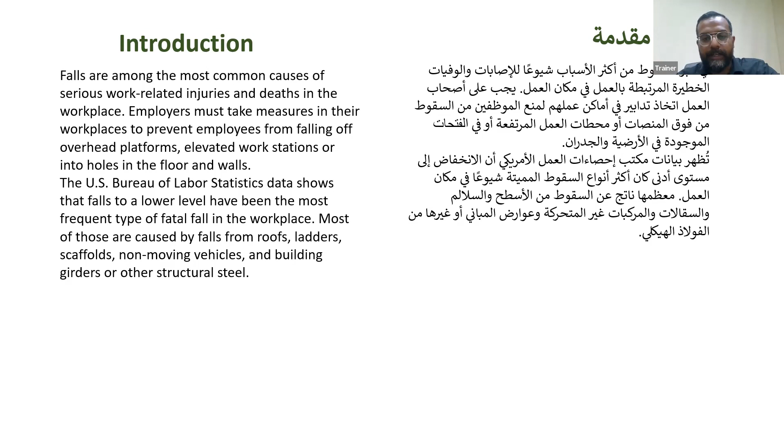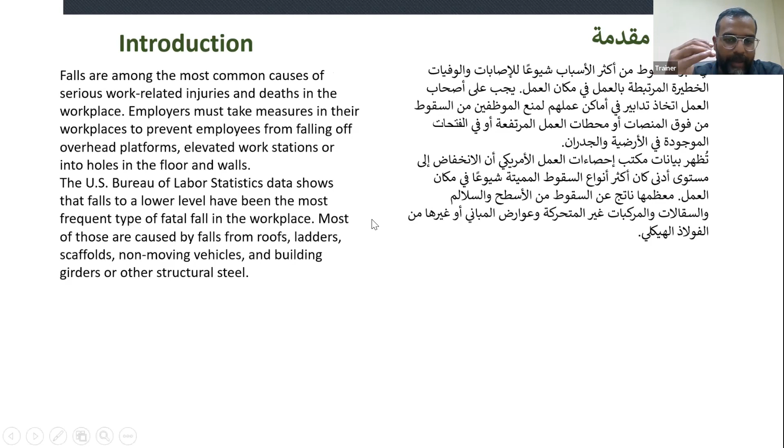So there will be lots and lots of potential for falling. Before moving forward, can you please describe the process you are following in your company, or what is the major hazard of fall, like why you are enrolled for working at height? What activity makes you go on height? Can somebody tell me?

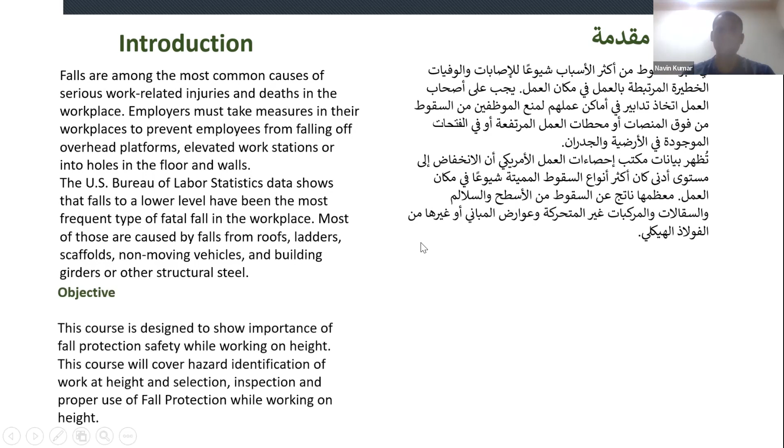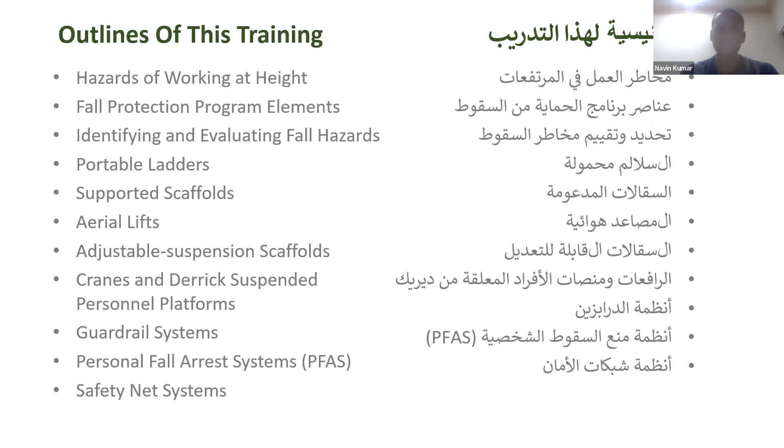Praveen responded: Now I have to work on stack testing exactly, so I have to go to the furnace or the stack at height. So it's required for me to get the safety training for our safety purpose. So this is the main reason why we are here.

Okay, and other people as well, I think. Javed is also in the same field. He has 9 years of experience in this field, working since a long time, so I hope he is aware about all the safety things.

And others, last time when we did a session with your company, with your other team members, they told me that there was some kind of platform they have to go on top of to verify if the tankers are filled, something related to this. Is it the same scenario in your job, or is it different? I think, sir, in the fugitive leak monitoring, we go on top of the tank. So this is also related to our job.

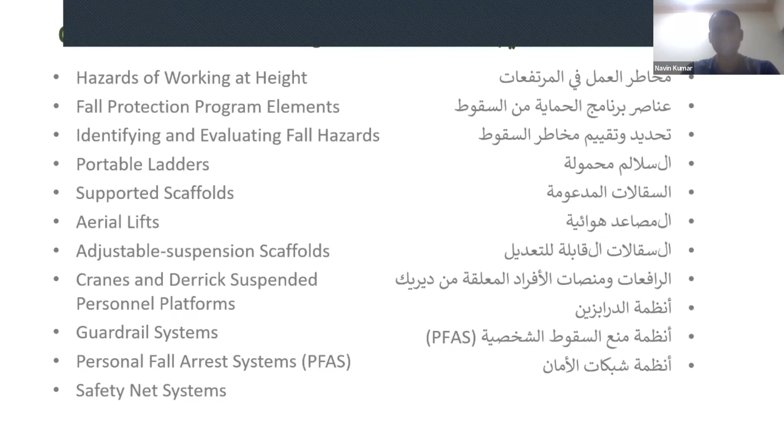And your work is inside which facility, Aramco or Saudi Electric Company? We are in the stack testing field, so we have to go to the facilities and do their stack testing. Environmental monitoring of the emission, stack emission monitoring like this.

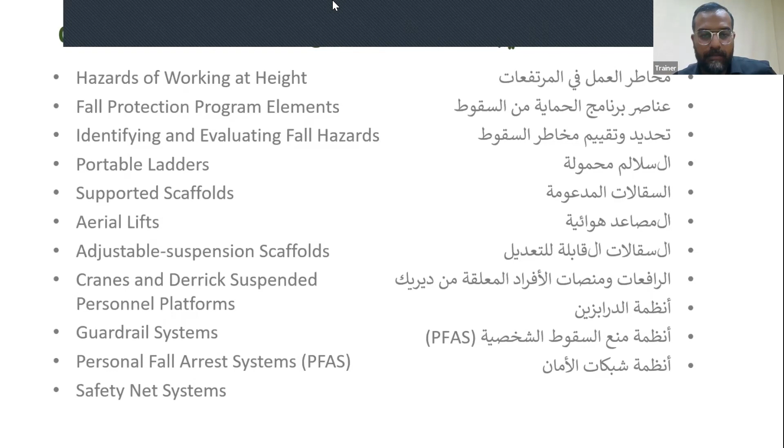So moving forward, I will tell you what we are going to discuss in this training. First, we are going to discuss the hazards, the dangers you are going to face when working at height. Then we are going to discuss the fall protection plan or fall protection program. Then how to identify hazards, how to evaluate hazards, how to use portable ladders, how to use scaffoldings, what are the guardrail systems, what are personal fall arrest systems, how we use safety net systems. These are some of the things we are going to cover in the training.

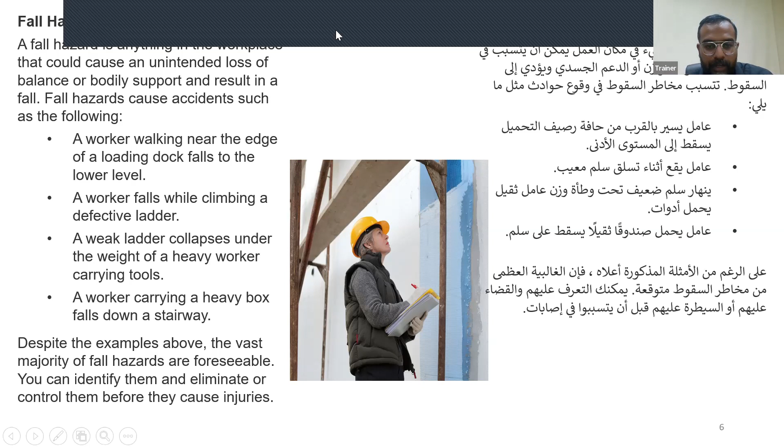A person who is carrying heavy weights and going down or up from the stairway, if he falls, that is a falling hazard. So anything, any scenario which causes the loss of body balance, in which you are not able to maintain body balance, will result in falling, and that is going to cause some issues, some injuries, maybe in some scenarios death as well.

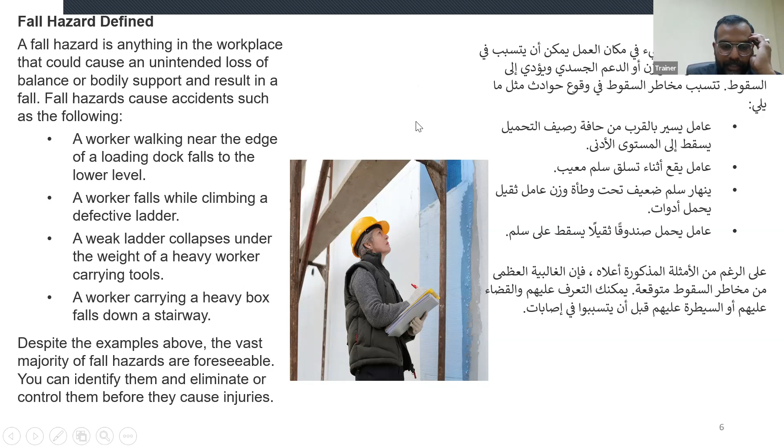So what will be the safe height to work on, or what will be the height at which you require fall protection? What do you think is a safe height for me? If I fall from 2 feet, will I be safe or not? If I fall from 6 feet, will I be safe or not?

Not safe, even from 2 feet or 1 foot. Very nice, very nice. Even if you fall from 6 inches, there is a possibility that you can get injured. The injury will not be a serious injury, but again, it will be an injury.

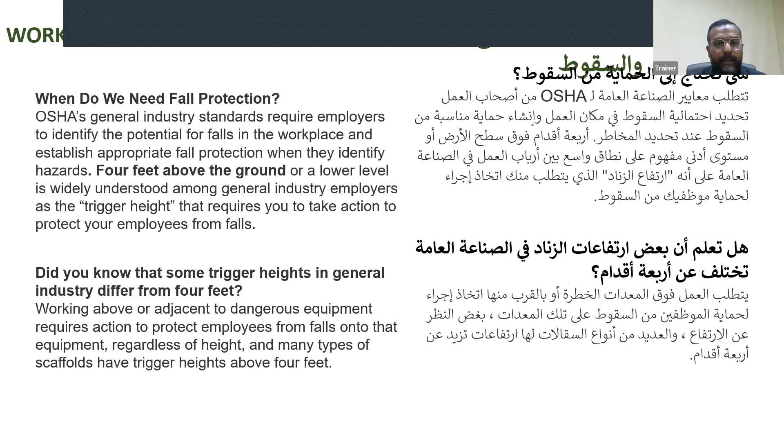Any injury which is going to affect you is going to affect the production of your company. It is going to affect the morale of the workers. If there is no action taken to remove the hazard from your work scenario, then the workers will not feel comfortable. They will not feel confident enough to work.

If there is any accident on the site and the company does not react by trying to overcome the issue which caused the accident, then the workers will not feel very good. The worker morale will be very low. They will think that the guy who got injured was our friend, and there was no support from the company. So they will think the same thing can happen with us as well. That is going to create a distance between the worker and the company.

As per American standards or OSHA standards, OSHA is basically the Occupational Safety and Health Administration, an American body responsible for all the health and safety procedures and practices in America. In Saudi Arabia, we have GOSI, which is responsible for maintaining all the things related to work, specifically insurance or people getting injured during work.

As per OSHA, any distance of 4 feet or above the ground is going to be considered as a trigger height. Trigger height means this is not a safe height; working from this height, if you fall down, it is going to create some issues, give you some injuries, or even death in some cases.

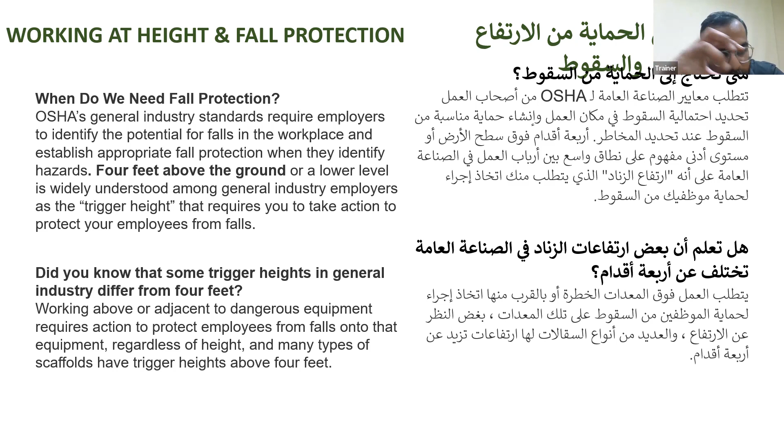Fall arrest means that you will be falling, but while you are falling, the system or device, or your full body harness, is going to arrest you mid-air. It is not going to allow you to touch the ground. It will be holding you mid-air so that you don't hit the ground.

Again, the standard does not matter as much. What matters most is you have to have the concept that if I'm working above a certain height, let's say 4 feet, if I fall down from this height, it can have serious issues with me, or the results will not be very good.

If you remember in the start, I said it is your priority to keep yourself safe. The company will provide you with the equipment, the trainings, and the PPEs. But again, it is your choice whether you follow the rules or follow the procedures.

So if I provide you a full body harness and tell you that Anas or Naveen, the safe height is 4 feet, so if you are working above 4 feet, you have to wear your full body harness. And Naveed decided, no, I am a Superman, I would not wear the full body harness because this 4 feet is not a big height. In that scenario, the company will not be held responsible for any injury, issue, or death.

So again, the purpose of this training is to make you aware of where you need this protection, and how you are going to save yourself from these types of dangers.

Now we are going to discuss the reasons or causes of fall, why people fall from height. The first reason is to save time or take shortcuts. When they are in a hurry, they will ignore everything because they are rushing to complete their given job. Maybe their supervisor is pushing them so hard that they think, I will not waste a lot of time wearing my full body harness, it's just a 3-minute job, I will just go up on top very quickly, finish the job, and come back. This mindset has to go.

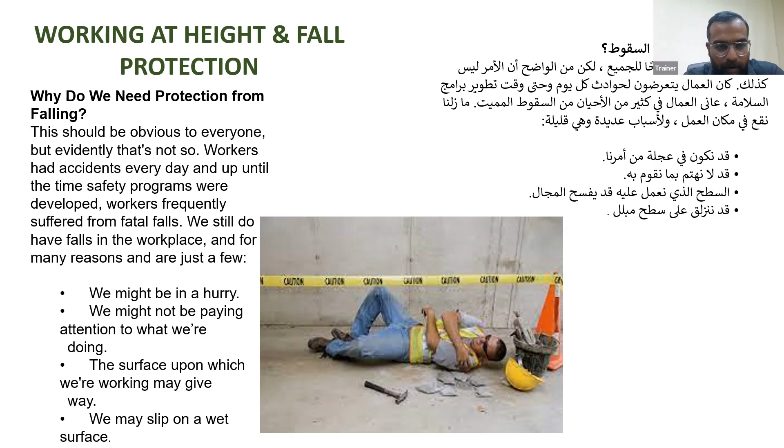So just watch this video. After this video, I'm going to ask some questions, and this video is going to give some valuable lessons. So please watch this carefully, all right? And let me know if you are unable to hear the video as well.

XL 1067, this is Jade with your Monday morning weather update. Things are looking up. Clear skies all week, a cool 77. It's gonna be beautiful.

Ordinarily, Jim went about his day, waking up at the same time he usually did, getting dressed, brushing his teeth, saying goodbye to his wife, heading out the door. All of this without thinking much about safety or about how many risks and hazards he faces every day. And he most certainly didn't have any idea that 50% of slip, trip and fall accidents don't even happen at work, but rather at home.

Jim would get to work and go through his day, everything as usual. Possible dangers and hazards just weren't on his mind. The usual causes of slips, trips and falls went completely unnoticed to Jim, and therefore slips, trips and falls themselves were not a possibility in his mind either. Things like boxes in the walkway or a puddle on the floor left from a spill, all of those sorts of things, and he'd pass by without any concern. Why should he pay attention to someone else's mess?

Well, what he didn't know was that employee exposure to wet floors, spills and excess clutter increased the risk of slips, trips and falls and serious injuries. These injuries include head trauma, back injuries, broken bones and even paralysis. It was clear that Jim also had absolutely no idea that more than 600,000 Americans are permanently disabled from workplace slips, trips and falls each year.

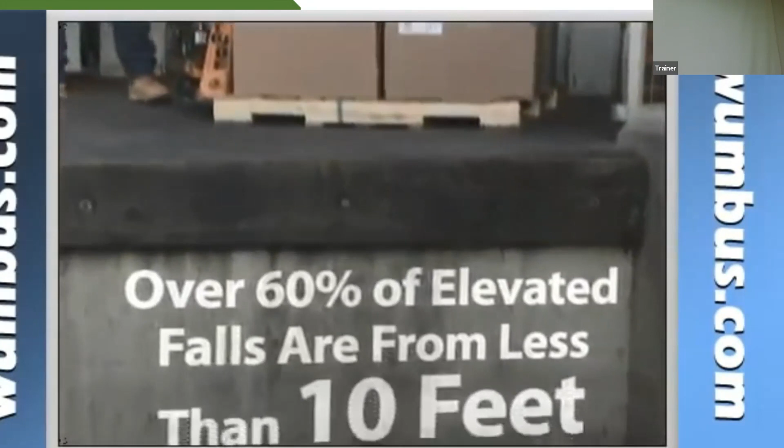But falls from risky low elevation areas like loading docks are incredibly common. Over 60% of elevated falls are from less than 10 feet. Loading docks and ramps are frequently congested, and walking surfaces can become wet and slippery, especially in the morning or during the winter.

Clearly, they're a hazard, but not for someone as confident as good old Jim.

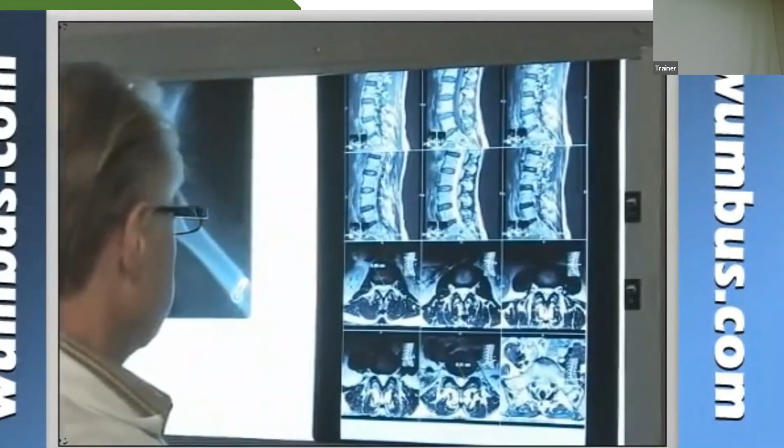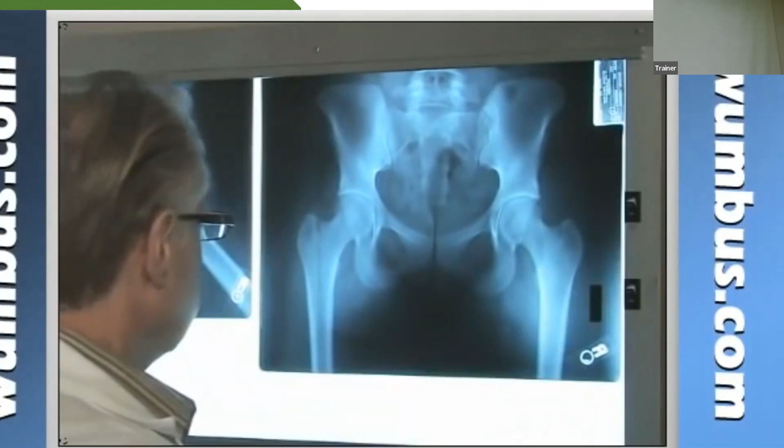Fall injuries are most commonly fractures, usually of the hip, spine, or forearm. These are also known as osteoporotic fractures. In past years, medical costs for this type of fracture exceeded $6 billion. That's a lot of injuries, and that's just a little proof of how common they really are. Hip fractures are the most serious and cause the greatest number of chronic post-accident health problems. An everyday hip fracture, including all medical care, can cost an average of $20,000 in the first year after the injury occurs.

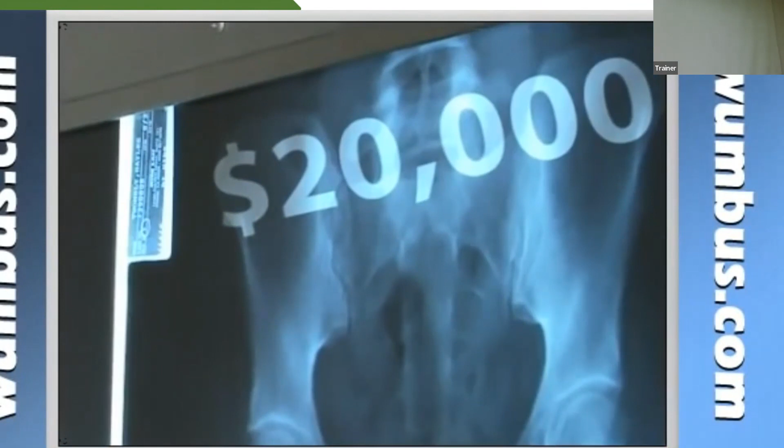The edge of a loading dock plate can wear smooth and become a slippery and dangerous spot. Accidental moves and backward steps can easily result in a fall from a slippery dock, so it is important to move with caution when working in a loading area.

Indeed, it was a day just like the rest, until Jim had his first experience with what we call a near miss. At that very moment, something changed, something that would stay with Jim for the rest of his life.

So what were the major lessons in this video?

The video shows us to sleep well, pay attention at your work always, even at a small height. Take all the precautions, safety precautions. If you are working on a ladder, that support must be taken by the user like this. Always wear safety shoes that cannot slip.

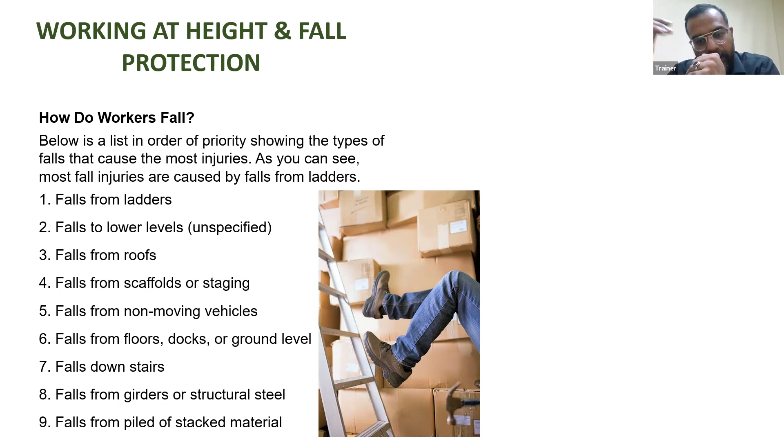As you can see on the screen, there are multiple factors. People can fall from ladders, from lower levels, from roofs, from scaffoldings, from non-moving vehicles, from steel structures, girders, piled stack materials. Whenever you are not on the ground, on any type of surface or platform, there is a high chance that you can fall.

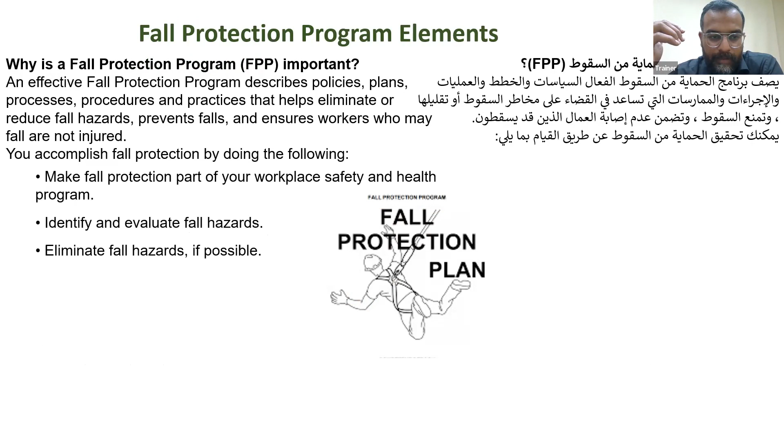So now comes the fall protection program. It is a program developed in your company which addresses the issue of falling. It is included in your health and safety plan or policy. It is a major part of your health and safety policy if you have work at height. And I believe you have work at height, so it will be included in your health and safety plan.

What are the things included in the fall protection program? First, if there is exposure to work at height, if your job requires you to go to height to work, you have to have a fall protection plan. In this plan, you will try to identify and evaluate falling hazards. You will identify the places or locations from which a person can fall, and the situations from which a person can fall.

Once you identify the hazards, once you identify the places where there is a chance of falling, you will try to eliminate those hazards if possible. How are you going to eliminate them? The first and most important thing is, if you can substitute your work from height to ground level, it is the most preferred option. For example, if there is a part you need to install or maintain at height, try to remove this part and take it to ground level, then do the repairing or maintenance.

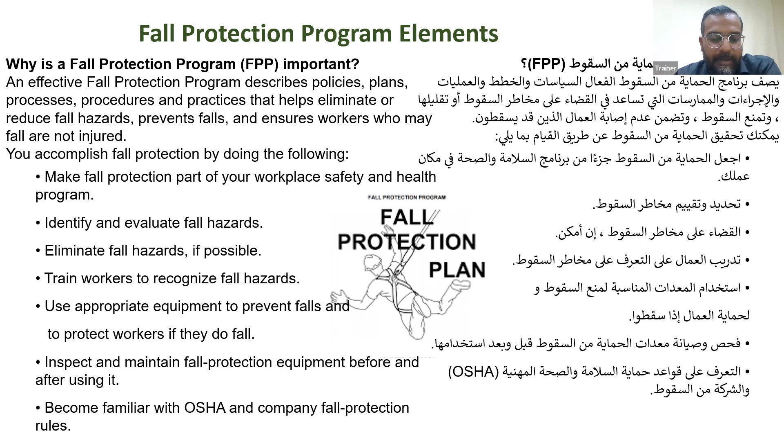As a rule in most companies, if you are going to work at height above 1.2 meters, or let's say 1.8 meters, you have to wear a full body harness. Or if the scaffolding tag is yellow, saying full body harness required, you have to wear it. These rules, and their implementation, are included in your fall protection plan.

So what's your responsibility? Everybody in the workplace has some kind of responsibility, from top management to each employee. They have to follow some rules, and they have their own responsibilities. The employer, meaning your company, has responsibilities too.

They have a responsibility to provide you training, to provide you with safe equipment, and to provide you with PPEs.

As per employees, you have a responsibility to follow those rules. If there is a sign saying please wear full body harness before entering this area, you have to follow that rule. You cannot ignore it or bypass it just because it's a 2-minute job, thinking why should I go back to the store and bring the harness before going up. No, ignorance or shortcuts will always lead to accidents.

So how are we going to analyze and evaluate the falling hazards? As I told you, doing a detailed assessment, or even just visiting your working area, will let you know what hazards you are going to face.

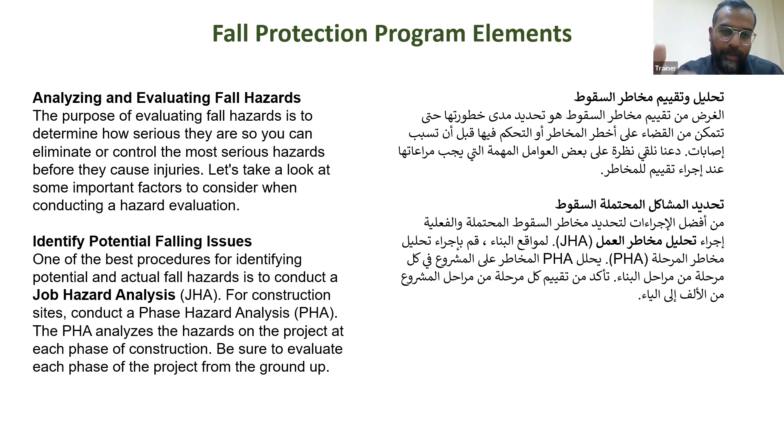Who will do this? A person who's qualified. Let's say you have a safety department, they will do a risk assessment and develop some rules. Or if you are working at your client's location, or somewhere else, the risk assessment would already have been done. They will just place a signage saying please wear your full body harness, or working above 1.8 meters full body harness is required. These are the rules developed after analyzing and evaluating the fall hazards.

An important thing for you is to be aware of your surroundings. If you are working, let's say, on the edge of a platform, and your job requires a lot of focus, when you are going to be working on that edge for 6 hours, there's a high possibility that at the start of your work, or in the morning, you will focus on being careful, knowing you can fall because it's an open or dangerous area.

But after working for 3 or 4 hours, your concentration and focus on safety will become low, because your mind will adopt the thought that this is my place, I know this area well, and I am aware I will not fall. But that thought can lead to dangers, or that thought can lead to falls.

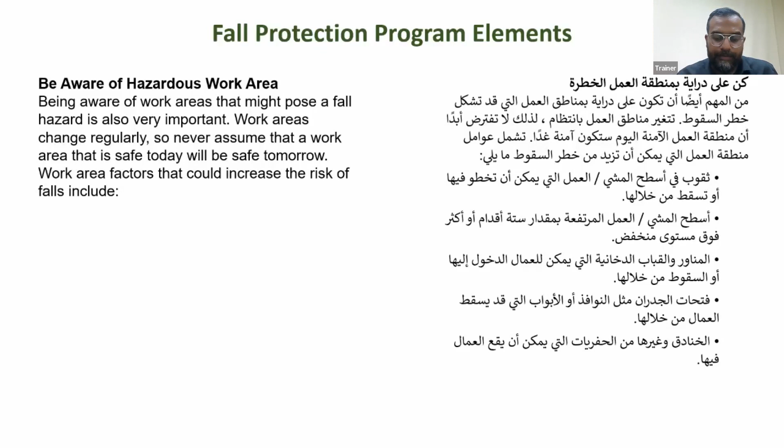Sometimes the hazards keep on changing. During construction there will be different phases, or different scenarios, like when you go on a platform to see how much a tank is filled. Not every time will there be a tanker down there, right? So conditions will be changing continuously. You have to make sure you are aware, and realize which location you can fall from, and which activity can lead you to falling.

So I'm going to highlight some of the things that commonly create falls. The first thing is holes in the walking area. If there is some kind of big hole, or the scaffolding plank, with 2 planks removed, it can cause you to fall to the next level. Sometimes walking surfaces are elevated 6 feet or above the ground, and in that scenario, any misstep can cause you to fall.

Skylights, or a big gap in the floor left open intentionally for natural light to come inside the building - during construction phases these skylights or domes are open, not protected, with no barricade around them. So people, being careless, can fall into that.

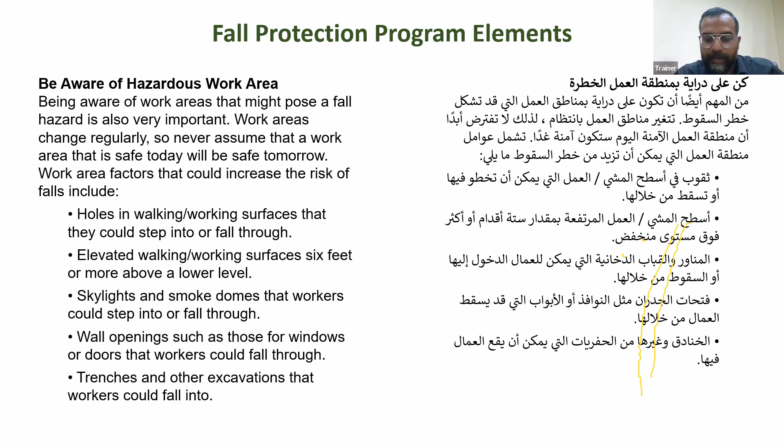Any edges of a working area or walking area, if it's not covered or protected, the person can fall. So if you are working on a platform, let's say you go on the stacks, definitely there will be some kind of barricade there, or any kind of guardrail that is going to help you stay in one place.

Is that the scenario when you go on the stacks, you have protection on the sides? Yes sir, we have that, so there is protection. And when you go on the top, you are wearing the full body harness? Yes sir. So where do you place your hooks? Where do you tie off? Where is the anchor point? Is there any specific place in which you will hook yourself?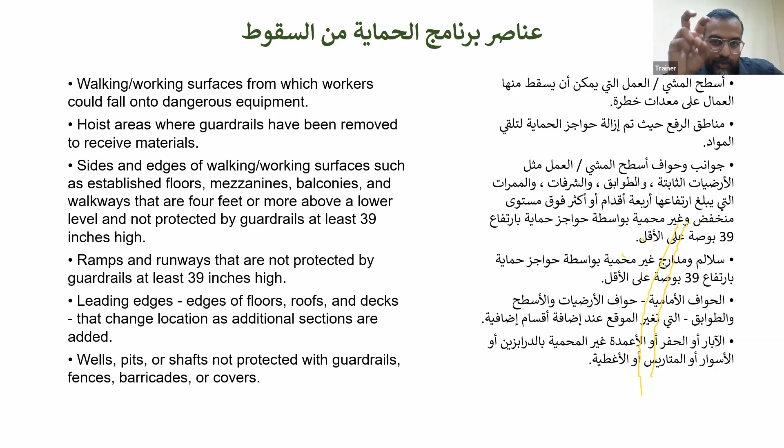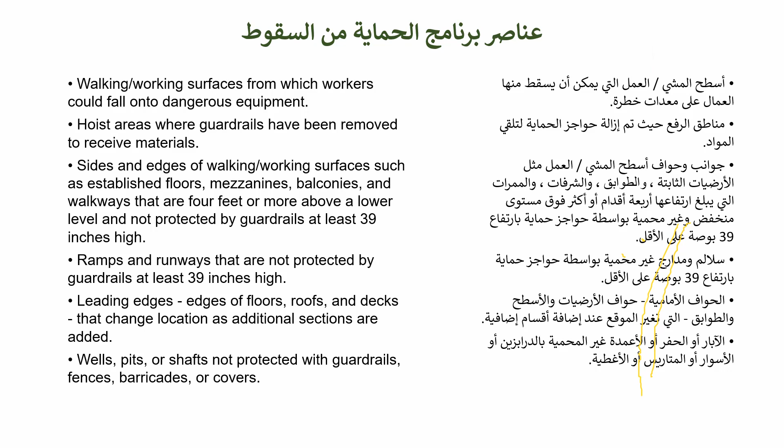Sir, around the top on the stack and the fence area, the platform, we will hook there. Sometimes we have a lot of activity, like we do the PM monitoring, so we move here and there. Sometimes we don't hook, so between the work we're moving, and we pick things from down to up. When we pick the things, we hook on the fence area on the top, the platform. Then sometimes we change the porthole, or we use the probe to go up and change the angle, so that time we don't use the hook. But we have the full body harness. We use all the PPE on top, and after when we start the sampling, we put the hook on the safe area.

And for sampling, do you use any kind of device to take the sample, or do you place your hand? No sir, we use a device, DGM, and we have a pump there, so we're collecting a sample from the stack. There's electricity also, so we also care about this hazard - the electrical hazard - we protect from there, and also protect from the stack where the gas comes outside. So we cover our porthole and everything, to make ourselves safe, and using the gas mask, and for some carrying we have a dust mask. So we need to make all safety protections.

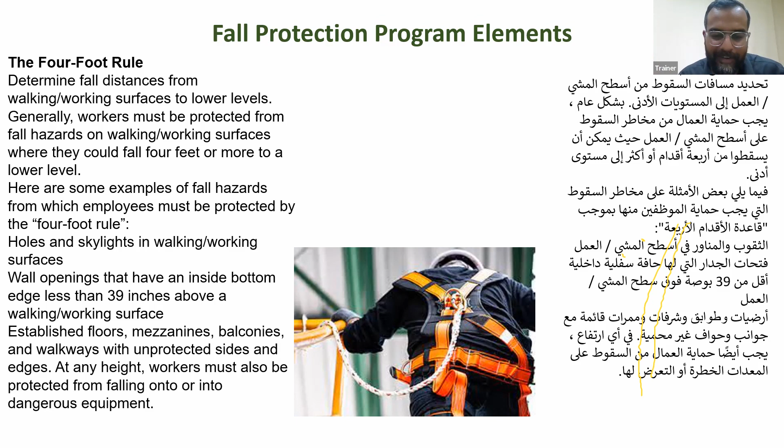Why? Because companies like to avoid it. Companies do not like to be involved or become responsible for somebody's death. So again, make sure that whatever things are provided, you have to use and utilize them properly. And again, if you know what the hazard is or what the outcome of that will be, if you consider that, you will be scared, and once you are scared, you will follow everything, and you will use the safety to the maximum extent.

For controlling fall hazards and exposure, there is a hierarchy. It's a step-by-step sequence which we can use to eliminate the hazards. I'm not going to go into detail because this section is mostly handled by the safety department.

But being a guy who's going to work on top, let's say you don't have the support of your company, then you have to realize and do certain things based on your own knowledge. So the first thing, once you identify a hazard, what are the things you are trying to do to control it?

First step is to try to eliminate the hazard or substitute it. Elimination means trying to remove it completely. If you can remove the hazard completely, that is very good.

But sometimes it's not practical. It's not possible to remove the hazard because, let's say, you are going on the stacks on top to take a sample. You cannot bring the stack down to ground floor every time to take the sample, so it means you cannot eliminate it. Every time you have to go there.

If it's not possible to eliminate, then you try to substitute it. How do you substitute it? By trying some kind of alternate way, any alternate method which is not going to expose you to that hazard.

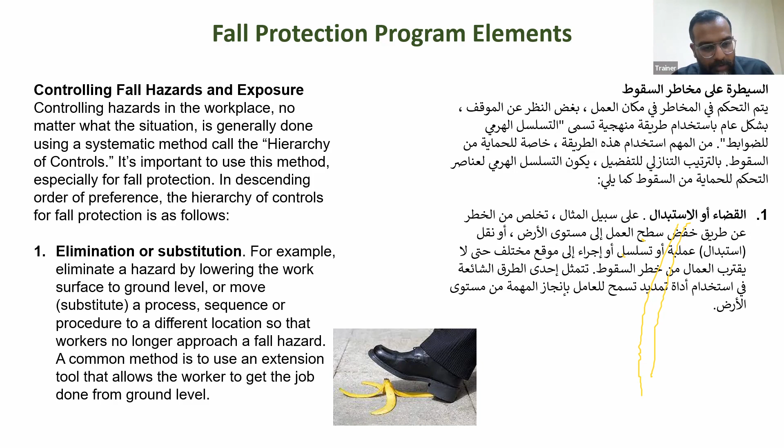But again, if it's not practically possible, the next step is using some kind of engineering controls. Engineering controls are things specifically designed to control or eliminate a certain hazard.

The example in working at height capacity: the engineering controls are the guardrails, the barricades, which are available in your surroundings. That is the engineering control.

They tried to eliminate the hazard but couldn't, because a person has to go to height.

So what they did is provide guardrails, so that whenever a person is working at height or on the platform, he is protected because a guardrail or barricade system has been provided.

If engineering controls are not effective, then you go to the next step, which is administrative controls. Administrative controls mean any policy developed by the company to control the hazard.

In this scenario, you will have signages. At the entrance or starting point of the ladder, you will see a signboard saying, 'Please use full body harness before accessing this area.'

Or there will be a policy described when you join the company, that we have work at height, and anyone working at height has to wear the full body harness, and anybody going for sampling has to use breathing protection.

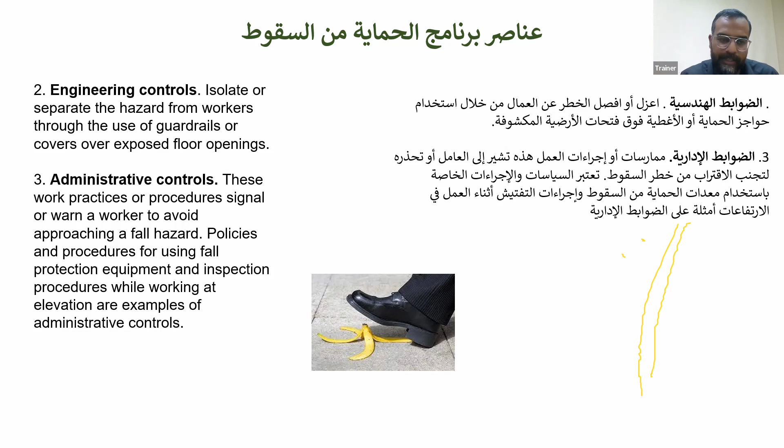Then there's the fall protection equipment itself, the full body harness itself. In the beginning you try to eliminate the hazard, but it could not be eliminated. Then you try to control it with engineering controls by providing guardrails.

Again, you thought that even with guardrails, there is a high chance somebody can fall from them as well. So you develop a policy and place signages that full body harness is required beyond this point. Again, people use the full body harness and they can still fall.

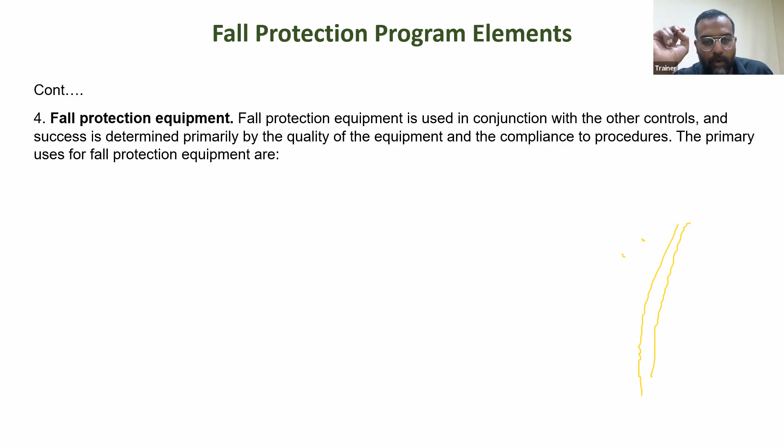So as a last resort, you made it mandatory that anybody using the full body harness and going to height has to do a 100% tie-off. He has to tie off his hooks and use the anchor point.

So these are examples of how you can try to control any hazard. As I mentioned at the start, there will be two types of fall protection. One will be fall restraint, which means it will not allow you to fall at all.

If you notice in the first picture on the left, this protection is not a lanyard — it's just a rope that holds the person, and it's not extendable or moving. It keeps the person in one place.

In the second picture in the middle, you see a guy with a shock absorber or fall arrest system. It will not stop you from falling, but it will not let you hit the ground or have an impact.

It will try to arrest you while you are in the air — it will arrest the fall and not allow you to hit the ground.

It will keep you mid-air. Then there is a third option of safety nets, which is not a practical option, and it is not commonly used in Saudi Arabia. But that is also an option, that even if you try to control the falling and after applying all the control measures, still the person falls down. So there will be a second layer of protection, that is going to be the safety net, which is going to catch the person when he is going to fall.

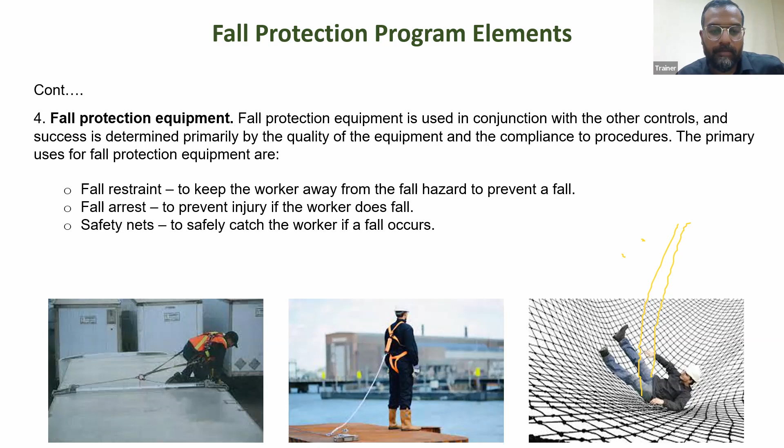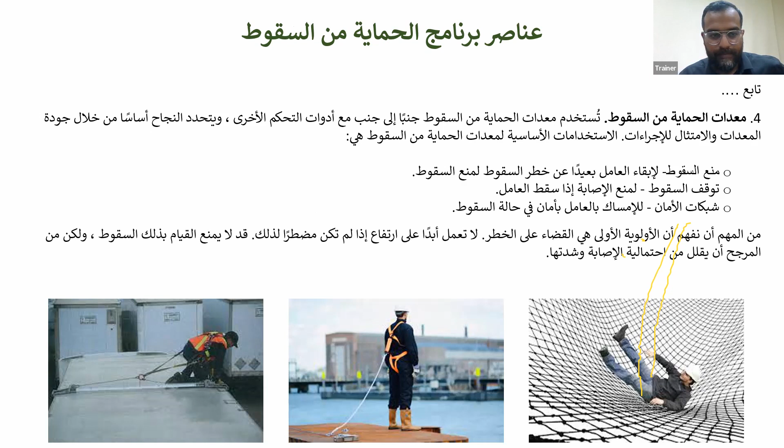So when you are going to determine the probability, remember I told you for the evaluation, you have to consider two things. What is the probability and what will be the outcome? How much percent is there a chance of falling, and once a person falls, what will be the result of the fall? So how are you going to determine the probability?

First thing is to check the frequency of exposure. How many times in one day does the person have to go on height? That is the first element. Then once he goes on the height to work, how long does he stay there? That is the second element. Then the third element is, what is the exposure? What is the scope of exposure? While he's working on the height, what will be the scope? Why is he on height? What things does he have to do while he's on the height? So these are some of the factors which you have to determine to find out the probability.

If you understand all these three things - how many times in one day you have to go on height, how long you have to stay there, and while you are staying there, what will be your job - if you combine all of these three things, you will find out what is the probability. Let's say for your 8 hour duty, you are going to take samples 5 times. So it means the more times you are going on height, the more chances of your accident are there. But if you have to take the sample only one time in 1 month, then the chances of accident are very less because the frequency is very low. Got my point? So again, that is the frequency.

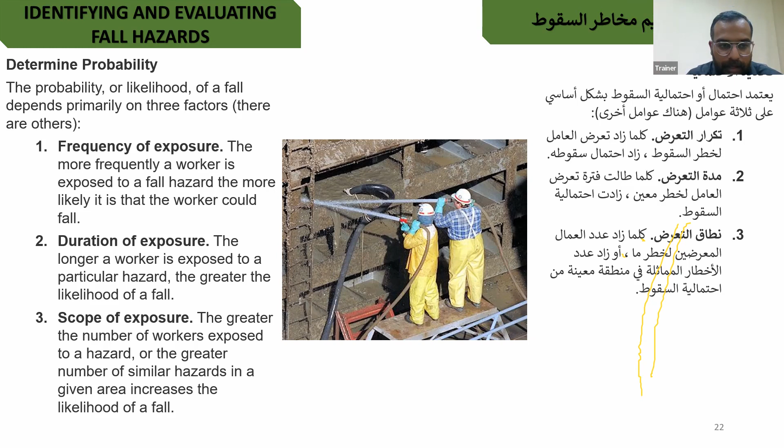So there are multiple types of fall protection available. The most common one is PFAS, personal fall arrest system, which you and most of the people in Saudi Arabia or in construction use. It's called PFAS. It is not going to stop you from falling, but it will not allow you to hit the ground. It will keep you in mid-air, so you will not hit the ground and hurt yourself, but it will not stop you from falling down.

Then there will be a fall restraint system. It will not allow you to fall. Basically, it will have a certain length, and this length will be decided such that if you are in the center of a platform, on the right side you have 1 meter distance, on the left side you have a 1 meter distance.

So this belt will be designed like this, that you cannot go on the right side more than 1 meter, and you cannot go on the left side more than 1 meter, because after 1 meter there is a heavy fall. So it's like this, it will not allow you to fall, it will keep the leash short.

Then there will be positioning device systems. It will not allow the person to fall for a certain distance. Like if you fall, it is going to stop you in mid-air.

It follows the mechanism of the safety belts in our cars. If you notice your safety belt, when you are moving and trying to open it, it will open freely, and maybe it can extend up to a longer size. But the moment you jerk it, it is going to stop in that location. It is not going to allow you to pull it more. And the moment you release your pressure from the safety belt, it is going to go back again. It's called a retractable system, right?

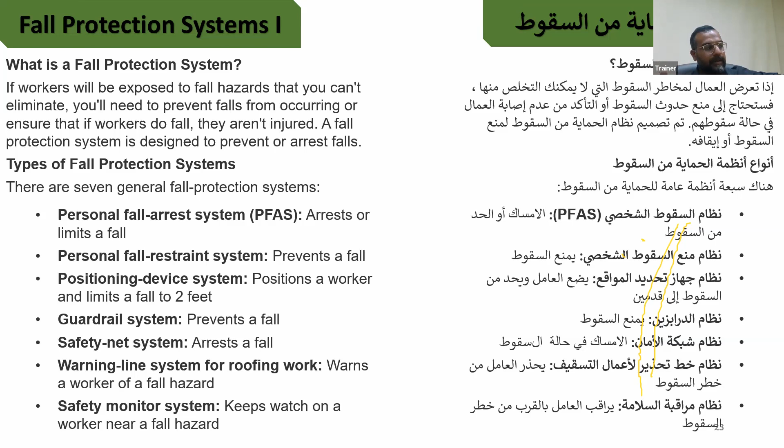Then lastly, there is a safety monitor system as well. A person stays on top, just acting as a security guard or a watchman. He is going to monitor everybody and inform everyone that, brother, you are going into the danger area, please come back. There is a high possibility that you will fall down.

Other methods involve roof work, if you are working on roofs. This is the picture of a skylight, which I was discussing 3 or 4 slides back. The purpose of this skylight is basically to get sunlight inside the building. So during the construction phase, this section is left open.

So as a good practice, you can do the barricade, or now people are using safety nets. Sometimes only a wooden plank is used to cover this. But again, the purpose is to keep you away from falling. You can use the barricade as well, or you can use the guardrails as well.

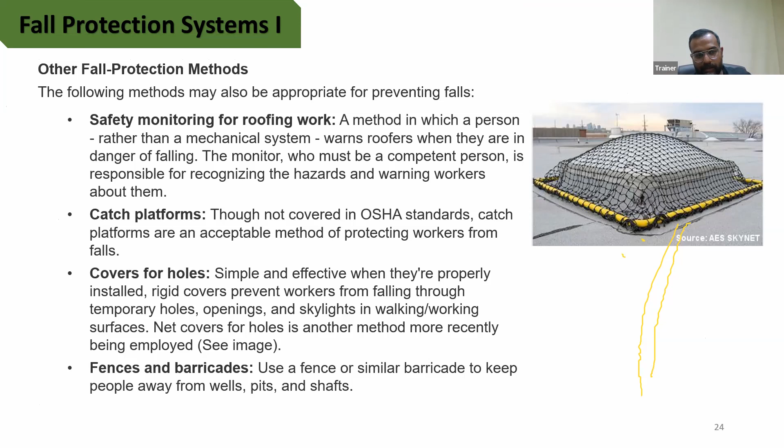When we talk about evaluation, if you are working at height, you have to evaluate how much distance you have. Like if I move to my right, after 5 steps, there is a fall. If I move to my left, after 5 steps, there is a fall. So in your mind, when you are on top of the platform while working, the first thing you do is analyze or assess what your safe zones are. And you have to keep in mind that whatever happens, I'm not going to take 6 steps towards my right because I know only 5 steps are safe for me. The 6th one will cause me to fall to the next level.

Then you also have to understand how many people are exposed to that. Let's say if you are not going alone on top, then there will be 2 people who are exposed to the height, like they can fall down. And what is the task, what do I have to do in my duty on a daily basis, or what is the scope I have to do when I'm at height.

Whenever you are working, you might have heard that you should plan your job before working. Do a detailed plan, then start your task. Why is planning important? Because planning will make you aware of the situations. It will tell you what the danger zones are, where you have to control yourself, where you have to use the PPEs, where you have to use full body protection, and how you are going to secure yourself, where I'm going to place my hooks if I'm going up.

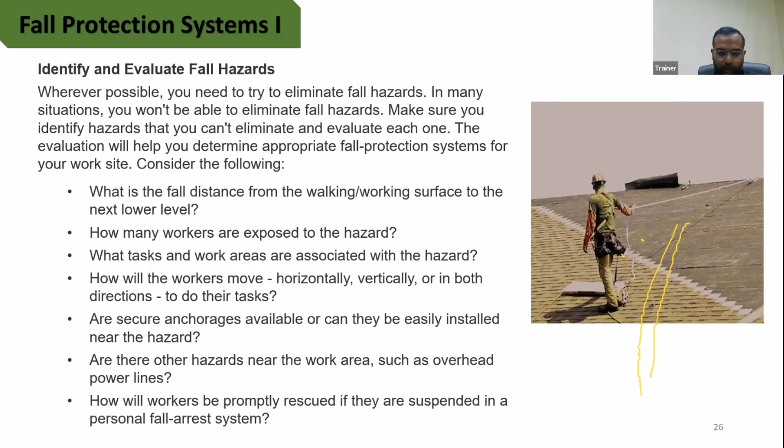Once this method is approved, they will do the analysis of the steps you are going to take for sampling. Once these steps are identified, they will find out how many hazards you are going to face. In the toolbox talks or team meetings, somebody is going to convey those hazards to you - for example, if you are going on a certain stack, there is one step of the ladder missing, so you have to be careful about that ladder. Wherever there is an issue, it has to be conveyed to you or to the people who are going to work there.

Make sure that you plan your job, make sure you have good knowledge of your surroundings, make sure you know what the emergency procedures are. If somebody falls down, who should I call? If somebody falls down, how much time do we have?

Before going to the height, just verify your full body harness - your equipment is safe, free from any kind of damage, free from any kind of wear and tear. The quality should be very good, and check if the monthly inspection has been done on the device.

So when using a full body harness, you have to make sure where my anchor point will be. If I'm going on the height, where am I going to place my hooks, how am I going to use the connectors. The full body harness has 3 components. First is the harness itself, FBH. Then on the back side you will have the D ring, which is basically the connection point of your lanyard.

The hooks and the lanyard itself are a different component - not part of your full body harness, it's a separate part that you connect to your full body harness. Ultimately, all together, these things will be called a fall arrest system. Full body harness itself is not fall protection, it is not the fall arrest system. Full body harness combined with lanyard, combined with connectors - then it is called a fall arrest system. The lanyards will be different types.

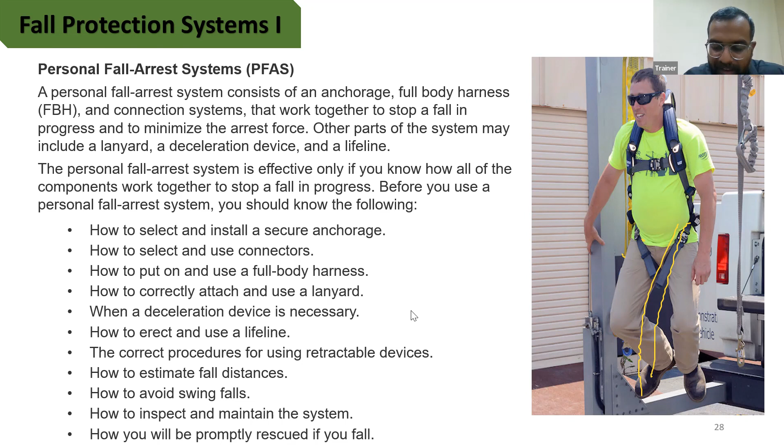So again, you have to make sure that you have a rescue plan as well, not just giving people the harness itself and saying khalas, wear this and you will be saved. Once the person falls down and is hanging from the harness, there should be a rescue plan in place, that if a person falls down, how are we going to save him?

There can be multiple factors, again, depending on the client or depending on the company. So these are some of the things you have to consider. Now we are going to discuss the anchorage. If you notice here on the picture, the yellow point, that is called the anchorage point. Sometimes we are asked to put the hooks in whatever structure is already available.

But sometimes when there is a high frequency of exposure, like on a daily basis, somebody has to go there at height to work, then specific designs are made to be placed there for people to hook to, to do the anchor. This is called the anchorage point.

One more thing: the anchor points, your full body harness, the lanyards, and the carabiner, the connectors which you use for connecting yourself, all have to have at least 2.5 tons strength capability. Now there will be a question in your mind: a person averages about 100 kg. So why do we need 2.5 tons strength?

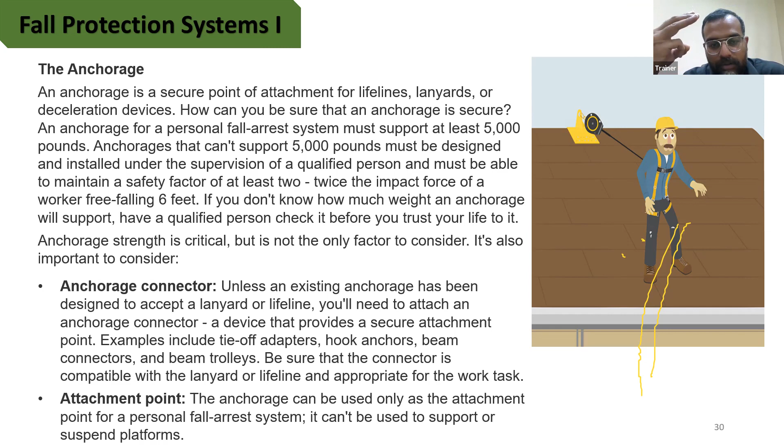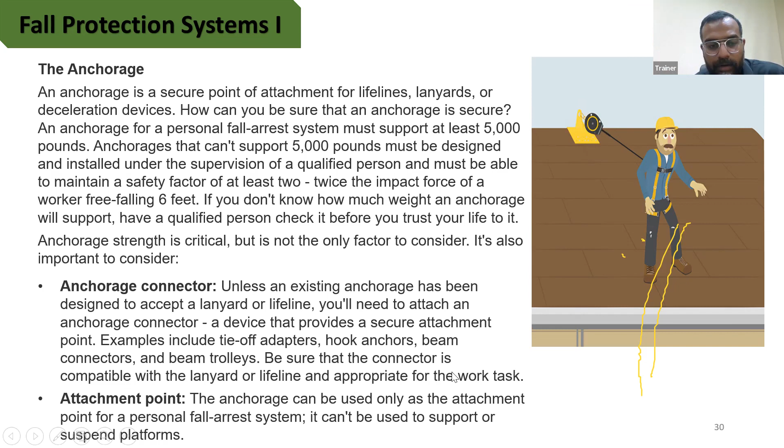This will also apply for the lifelines, for the anchor points, for your lanyards, and for your full body harness as well. So the anchorage connector is the place in which you are going to place your connector. The attachment point is the point where you connect your lanyard from your full body harness.

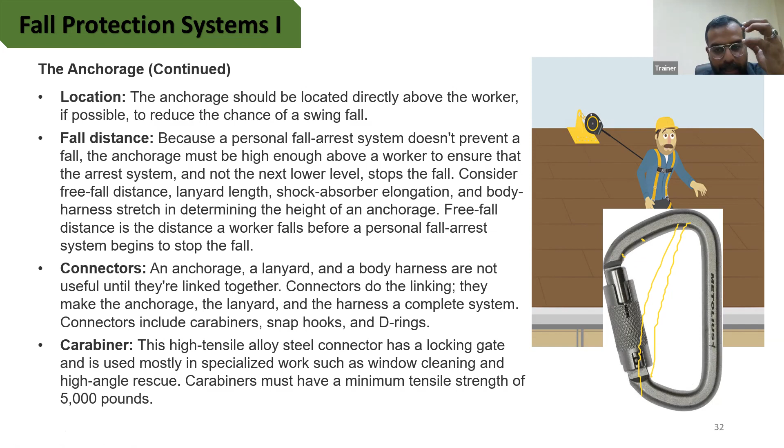So these are some of the devices which are to be inspected as well. Once you are going to use your harness, you have to inspect it before use on a daily basis, because we cannot risk our life. If there is a minor tear in your harness, the strength can be reduced, and in case of any fall, the results will not be very good.

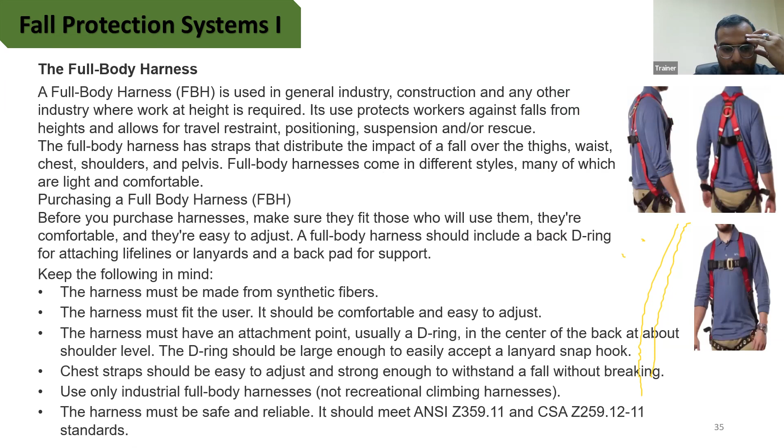So you know how to wear your full body harness? Yes, sir, we know. So what happens with the hooks? Where do you place your hooks once you are not using them? So we put them on the front side, there's a D-ring, so we hold our hooks there.

Okay, you're right, but you just place them there directly, like here. Yes, sir, they are hanging on your sides, the lanyard. All right, so it can be done, but it is dangerous. These hanging lanyards can get stuck somewhere. It can also get into your feet while you're walking or moving up the ladder. It can get stuck somewhere.

Yeah, sometimes when you go on top, you need to care about this one and hold it properly. Sometimes you go on the monkey ladder and somewhere iron comes outside, so you need to be careful. First, you need to check the monkey ladder condition, how it is, check the safety fully. After that you need to walk up. All right, that's a good thing.

So I will try to demonstrate. I don't have a harness with me, but if you have two hooks on the lanyard, or a single hook? Then, yes sir, 2 hooks. So imagine your lanyard like this. This is the starting point, and this point will be your 2 hooks, all right? So imagine this part coming from behind. So what you will do as a good practice is this part will stay here. And if you cut it from the center, imagine, one part will go from here under your arms, and you will move it and bring it from here, and then you are going to place it here. Exactly, so in this way it is not going to be free falling and free hanging.

Very good. What happens is, if you don't have the 3 points contact, then there is a high possibility that you are not going to maintain balance while going up and down the ladder. Exactly, if we don't have 3 points, we can't balance. Yeah, exactly, and we are doing the same. And why do we call it 3 point? Because it can be 4 points as well, but you have to move as well.

So whenever you are going to move to the next level, you will release one hand to go on the next rung. Our leg, our hand will move, then we go. Exactly, so your both hands will be there, and you will release one of the feet to go on the next step, and the second feet will come there. Then again, at all times, 3 points will be in contact with the surface of the ladder. All right, that is the safe way of climbing the ladders.

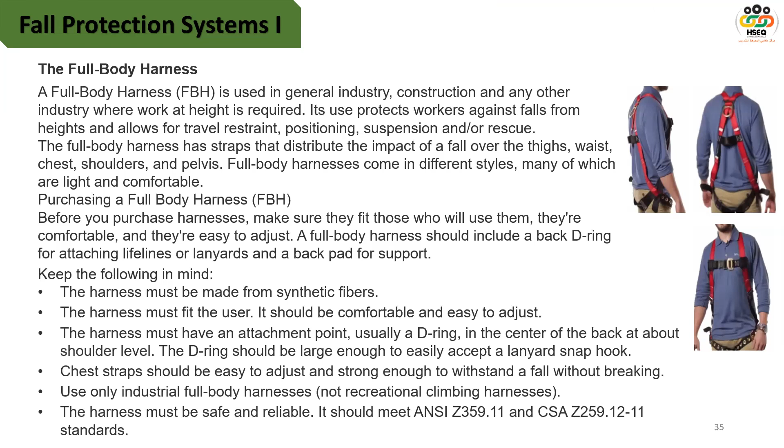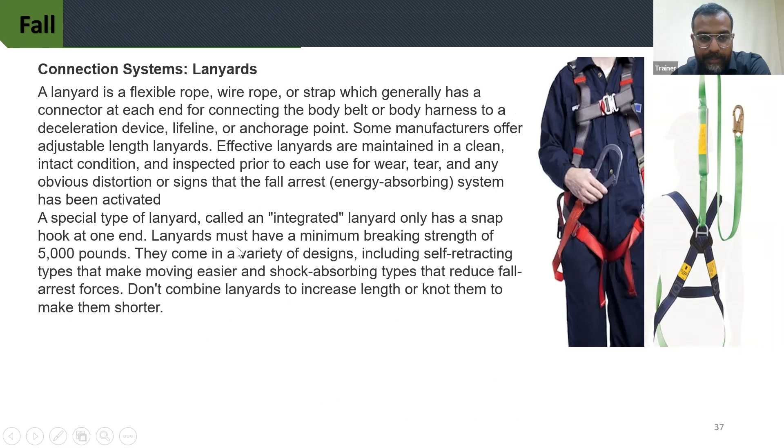So the lanyard can be of different types. There will be flexible rope as well. There can be wire ropes. There will be straps, flexible straps as well.

If you can notice here on the red one, I believe this is the one which you guys are using in your company. Yes, sir.

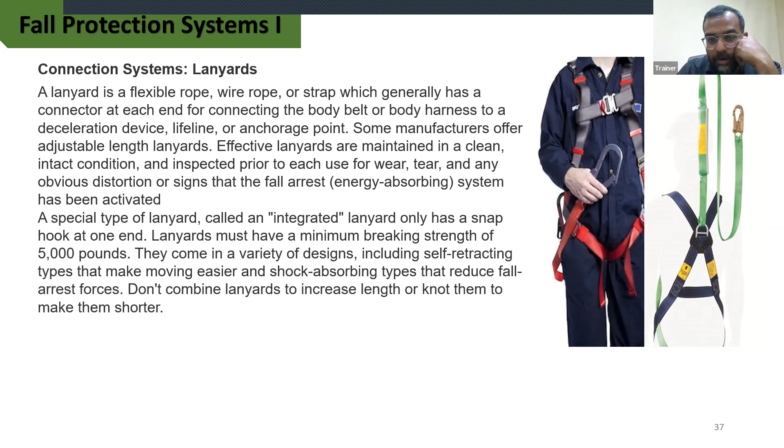So it can be of different types. The purpose of the lanyard is to provide you with the extension, and that is one purpose. The second purpose of the lanyard is to stop or slow down your fall. It is having energy absorbers.

So it is called rip-stitch lanyards. What happens is this lanyard is folded and roughly stitched. So when you fall down, each step will open but at slow speeds. The stitching will rip off and it will open like this. Then the second level will open like this. So it opens step by step, each step the stitching will break and it will open.

The length of this lanyard when it's opening will be 1.5 meters, only the folded part. So why is there stitching, and why is it trying to stop or control your drop?

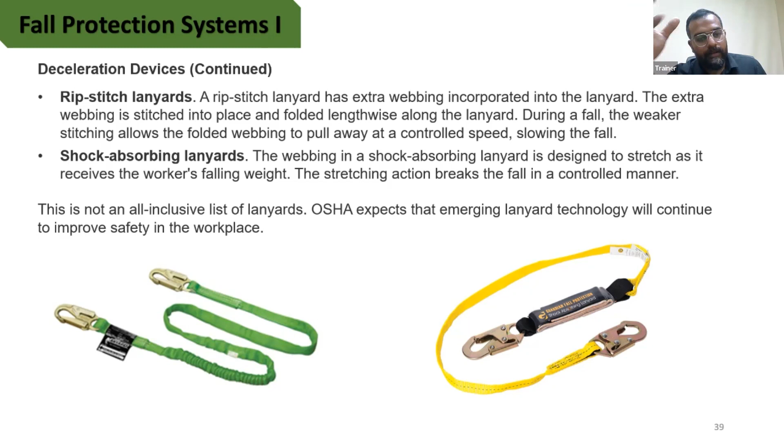To prevent injury, yes, by preventing any jerk or impact on your body. So the fall is going to slow down, or it is going to absorb the energy, or absorb the shocks. It serves a purpose, just like the suspension in our car. These devices or lanyards have shock absorbers in them, so they will try to slow you down so that your body will not feel the impact.

So always try to anchor above your head and aligned with your body. Even if it's not possible to put the anchor point above your head, then try to anchor it into a structural beam or anything available that is strong enough to hold you. But make sure your body is aligned. If you are moving for your work, let's say 1.5 meters to the left, remove your hooks and place them there.

Again, that comes with practicality. If it's not practical, like if there is only one point for putting the anchor, then we cannot do anything. But if it's possible that you can remove the anchor from your previous location and once you move, you change the anchor point, then you always have to do it. But if it's practically not possible, let's say there is only one place on which you can place your anchors, then we cannot do anything.

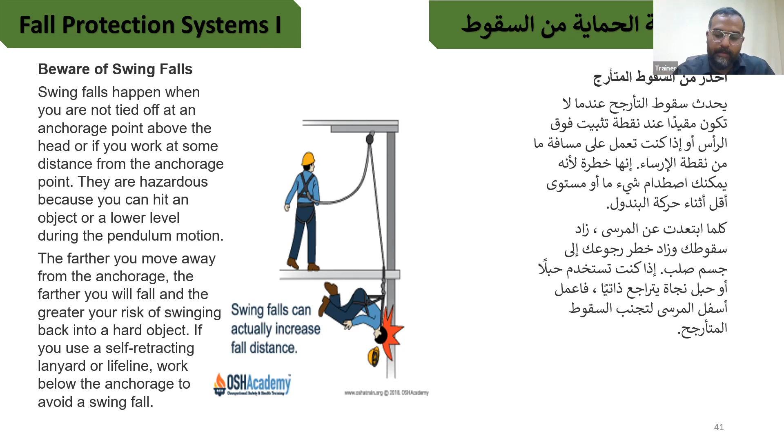So that is multi-layer safety.

Self-retracting lanyard, I'm not going to go into details. Again, it's not a common thing in Saudi Arabia, and it works on the same principle as our car seat belt. If you try to open it, it will continue to open, but the moment you give one jerk, it will freeze in the same location. And the moment you release the pressure, it will retract back into the original position.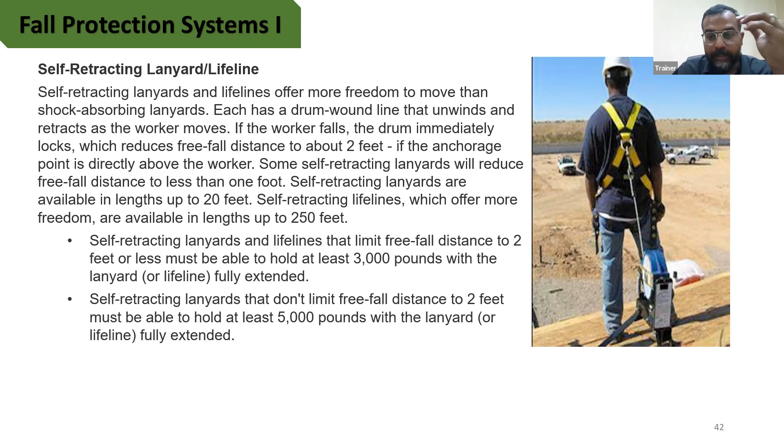This device is mostly used by roofers, people working on the rooftops of houses, because houses, especially in America, have tapered roofs. It's not straight like in Saudi Arabia. The roofs are tapered, so people have a lot of difficulty working on the roof. So this device is mostly used in construction of houses in America, but time to time there is a possibility you may be introduced to this thing in Saudi Arabia as well.

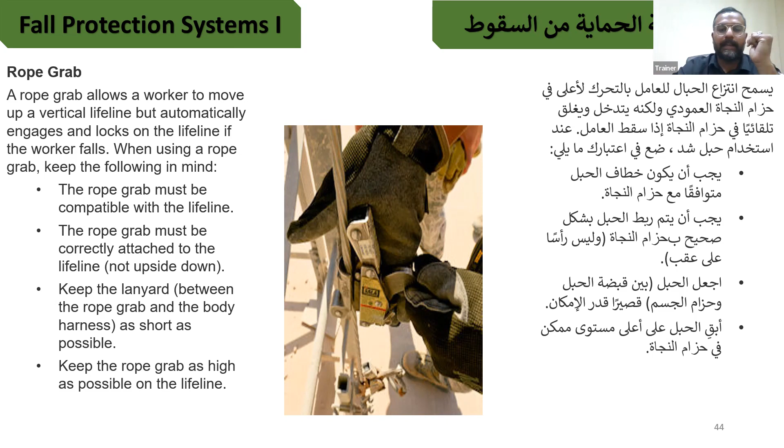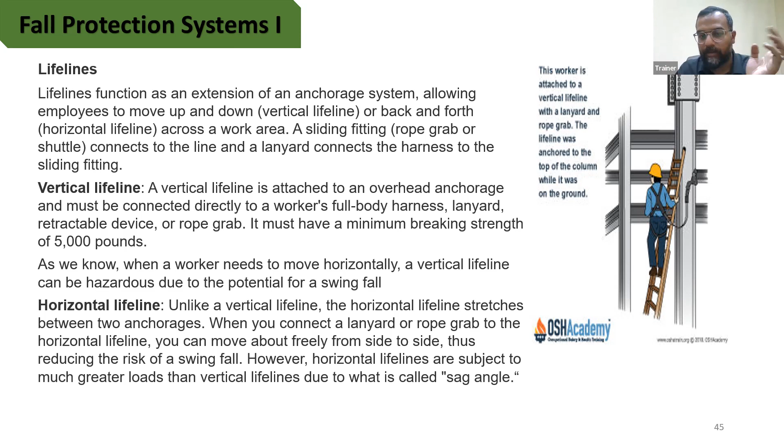This is used when you are using a vertical lifeline. Vertical lifeline will be this one. So if you are going to a height which is vertical, there will be a vertical lifeline placed. Why? Because there is no anchor point available for you to hook yourself. So engineers or safety people will design a lifeline in areas where you don't have any place to hook yourself, or no anchor points. Then there are horizontal lifelines, as you can understand from the name. Vertical lifeline will stand upward, and horizontal lifeline will be on the horizontal side, from right to left. Vertical lifeline goes up and down.

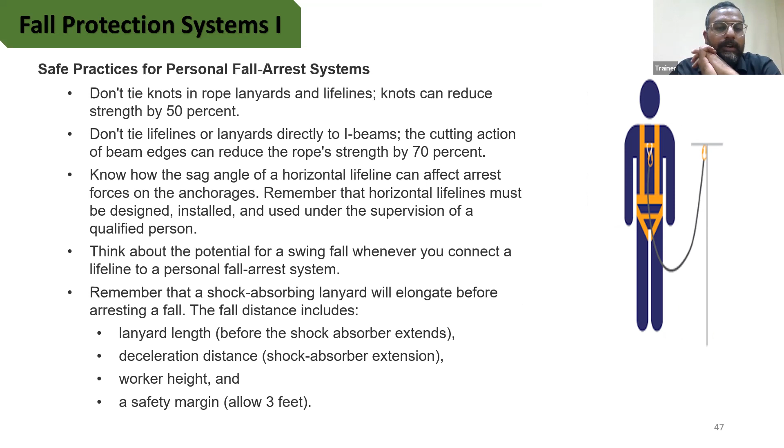So, some safe practices. What are the good practices for using fall arrest systems? First thing: do not tie any knots in your rope, lanyards, and lifelines. Knots can reduce strength by 50%. I told you this before as well.

Do not tie lifelines or lanyards directly to I-beams, if there is a structural support or structural member of a structure, like I-beams or girders. You know what I-beams or girders are? They're metallic structural beams. So do not place your lifeline or anchor point directly on top of them, because it can have a cutting effect since it's metal with sharp edges. The moment you fall down and there is a high impact on the lanyard, the edges of the beam will create a cutting effect, which will reduce the strength by 70%.

When you are using a horizontal lifeline, it is not fixed fully tight. There is some kind of leverage, or sag angle, as we call it. If it's loose, it will be flexible. If it's extremely tight, there will be high tension, no slack. And if you fall down, your body will have a strong jerking effect. But if we put some looseness or leniency in your lifeline, when you fall it will give you a shock absorbing effect, acting like a spring, which reduces the impact on your body.

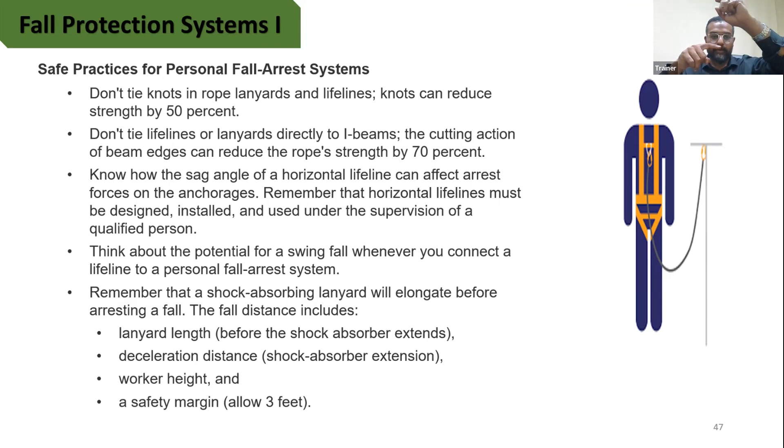So let's watch a video, and after this video we're going to wrap up this training, and you will have an idea of what is the benefit of using this full body harness.

So even using your harness is very important, and not only wearing the harness, you have to tie it off. I know people who, to be safe from safety people, just wear the harness and go on top so the safety guys won't give them a violation. But remember, you have to place your hooks as well. If you are not placing your hooks, there is no point of wearing this full body harness.

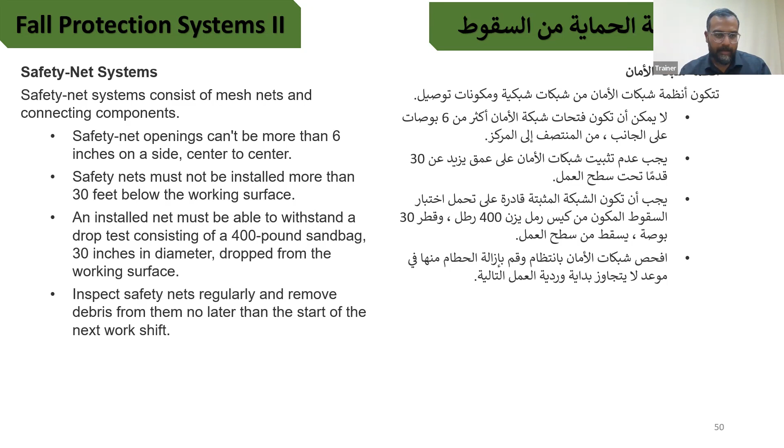That is going to be all. This last section is for the safety net system. I'm not going to describe it because we are not using this system in Saudi Arabia. This training is developed in America, and that is a common practice there, but in Saudi we don't use the safety net system. Maybe people in the circus use it, but not in construction.